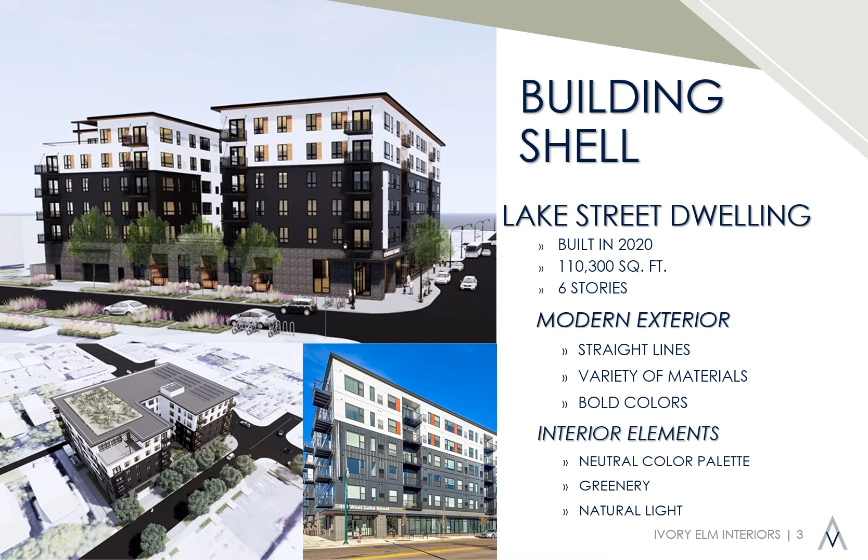Abby and I wanted Elevate to be different and unique to the NDSU campus. After looking at a variety of buildings, we chose to redesign the Lake Street dwelling to be our new student housing complex. The Lake Street dwelling building is located in Minneapolis and currently serves as an apartment complex. With over 110,000 square feet to offer, Abby and I took on the challenge of space planning and designing a new space for NDSU students to live at.

We decided to relocate the Lake Street dwelling to just on the edge of campus, on the corner of 17th Avenue North and 10th Street North. Currently, University Village is located here. Our plan would be to remove the southeast corner of buildings to allow for 83 new apartment units to be housed there instead, which can sleep at least 122 students.

We like this location because it is near a well-developed neighborhood, there are mature trees around, and there's public transit just across the street. After selecting our building and our site, Abby and I then began the design process.

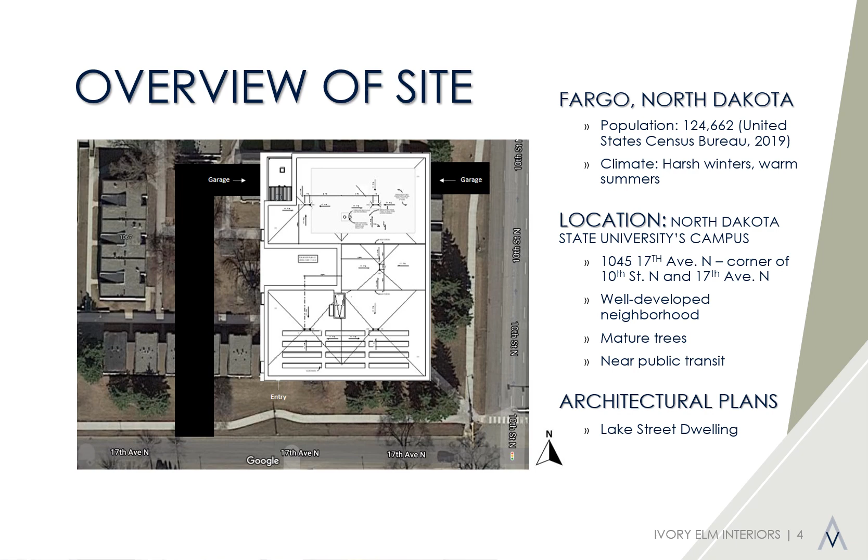Before we began the research process for this project, we developed goals that we knew we wanted to achieve through the new interior design of Elevate.

The three main design themes that we wanted to focus on in our research were how spaces impact overall well-being, ways to create a sense of community in a student housing complex, and methods for incorporating resident personalization. By developing these themes, we could narrow down our research to find out the best way to go about designing this new space.

A student housing complex is a great way for students to meet new people and have designated spaces to focus on their studies to ensure academic success.

To begin our research, we decided on two areas of focus for our literature review: sense of community and student well-being. While sifting through the numerous articles we read, there were a few things that repeatedly stood out to us, a few of those being the utilization of natural light, acoustical control, and providing collaboration areas for students.

Our literature review also emphasized to us how important certain aspects of a student housing complex are for residents. These days, students desire a variety of seating options for various majors, on-site amenities like a fitness center and technology center, and finally, the ability to dim lighting in their common spaces.

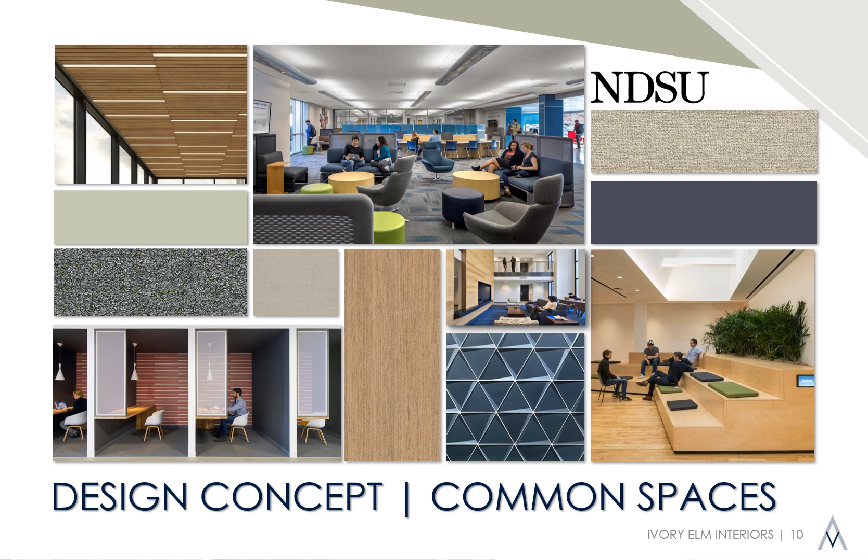From our research, we learned that students prefer to work and gather in a variety of spaces, so it would be important for us to showcase both private and public areas while still incorporating a variety of modern finishes and great amounts of natural light.

The same is true with the living quarters. Our goal was to bring sleek, modern finishes into the apartments that have great natural light. From our various tours of student housing and apartment buildings, neutral color and finish palettes were often used to allow residents to personalize their spaces as they wish. We want our apartment typicals to feel modern, clean, and include finishes that can withstand many years of wear as students rotate through NDSU. Durable finishes like quartz countertops, ceramic tile, and luxury vinyl tile will help keep the apartments looking as though the complex had just opened.

The first floor of Elevate houses amenities such as a conference room, technology center, fitness center, and multi-purpose room. We chose to design the multi-purpose room on this level. It is located right off the main corridor, and it is available to all residents.

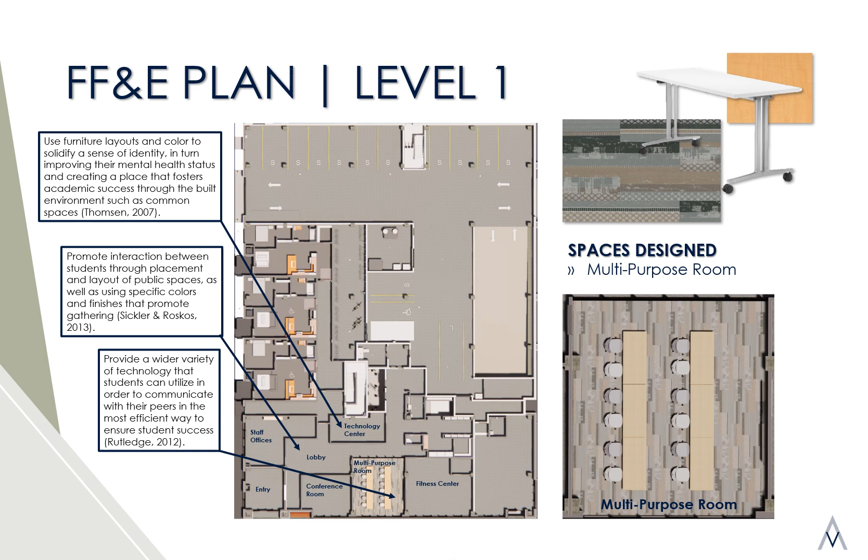From an article we read by Katrina Rutledge, we learned that it's important to incorporate a wide variety of technology within common spaces to allow for efficient communication and productivity. We have provided power receptacles under the tables and in the front for a podium to increase flexibility with this space. The multi-purpose room is equipped with a projector for presentations, seminars, or trainings.

The tables and chairs all have casters so they can be moved around easily to be manipulated for different events taking place. You'll notice that this room also has a drop ceiling to help with acoustics, while still emphasizing the height of the exposed 13-foot-high concrete slab above.

The carpet in this room also helps with acoustics while bringing in some fun texture, pattern, and branding colors to the space. The multi-purpose room is full of natural light thanks to the floor-to-ceiling windows. However, we have also provided remote control roller shades to help with any glare that may become an issue during presentations.

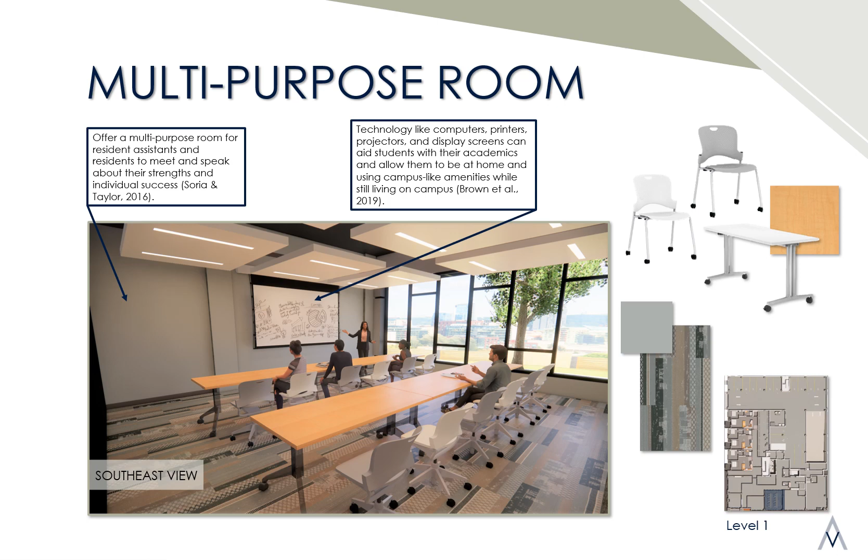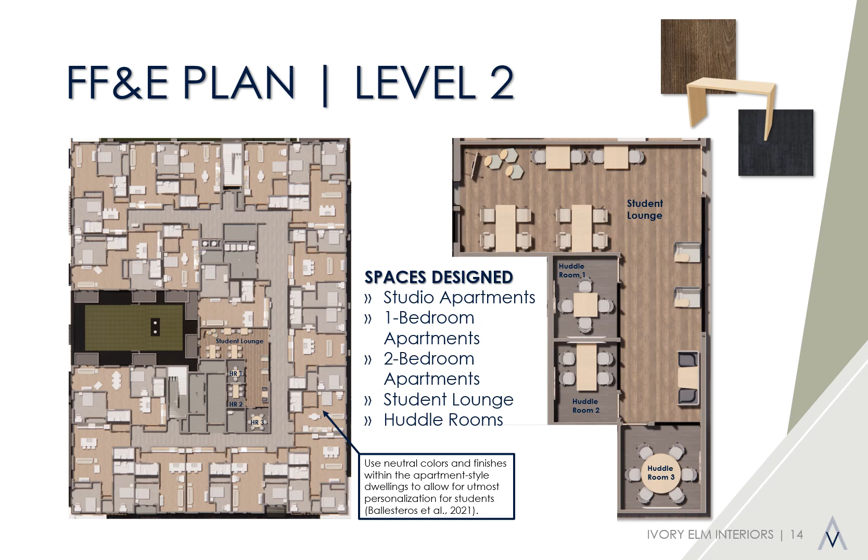This is the floor plan for the second floor of Elevate. We have space planned and designed for the various apartment typicals, student lounges, and huddle rooms on each floor. More specifically, the floor plan on the right outlines the student lounge, which has access to a balcony that overlooks the private interior courtyard. There is plenty of space for students to collaborate on projects or work independently, whichever fits their learning style best. Here is an interior rendering of the second floor student lounge.

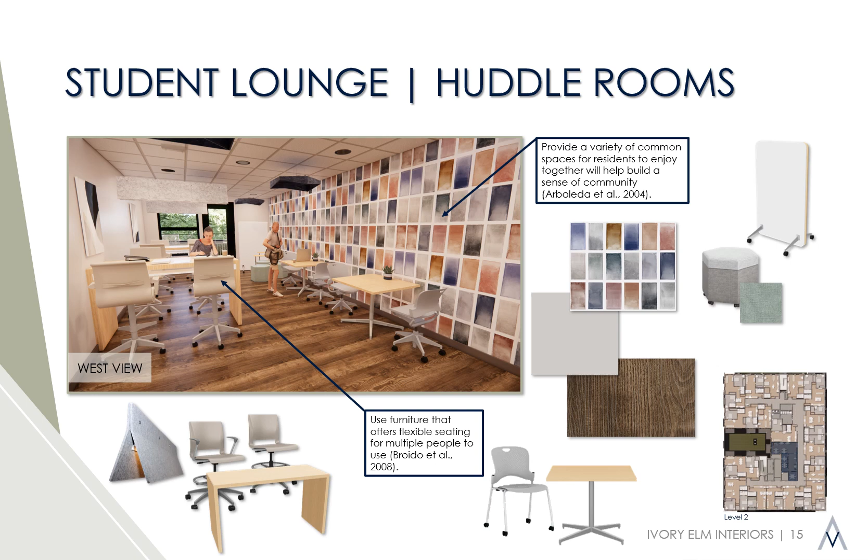There are also individualized seats near the glass walls. These glass walls help carry the natural light from the exterior through to the interior corridors.

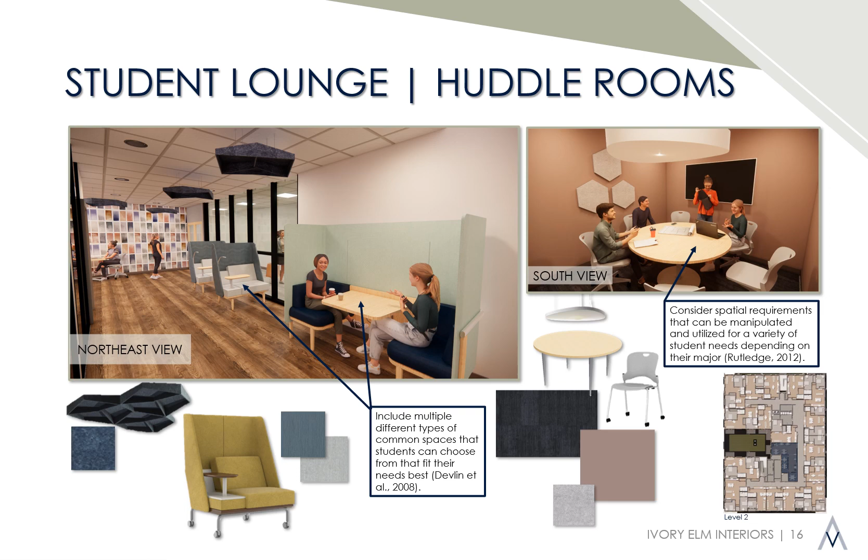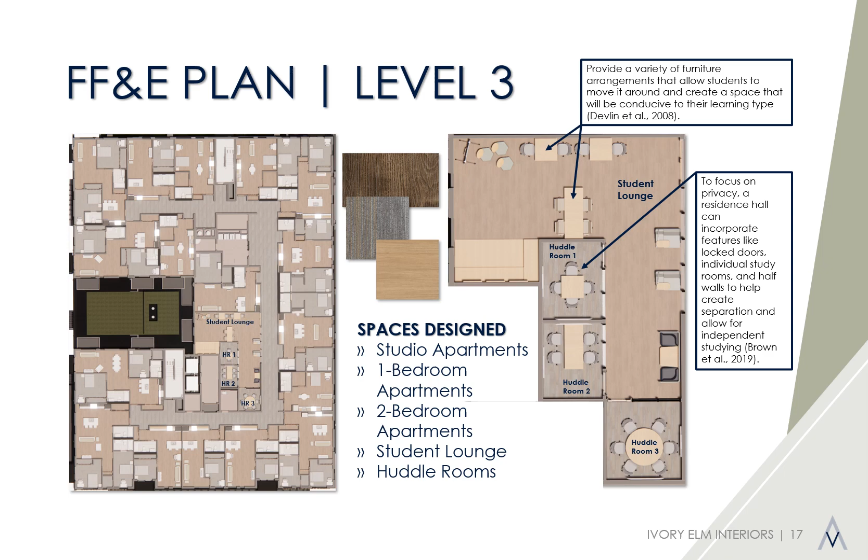The huddle rooms are specifically designed within the lounge to create privacy and acoustical control for students who want to study or chat as a group but still have the separation that they desire. By having a student lounge on each floor, we hope to increase student interaction and aid in socialization across the building.

This lounge is unique because it has bleacher seating that students can use to study and work on assignments. To ensure this feature can be used by those of all abilities, we designed the top seat to be at 21 inches above the finished floor, so if someone were in a wheelchair and would like to sit in the bleachers, they can easily transfer to the top seat. These design considerations can create a sense of belonging and promote student success, no matter their ability.

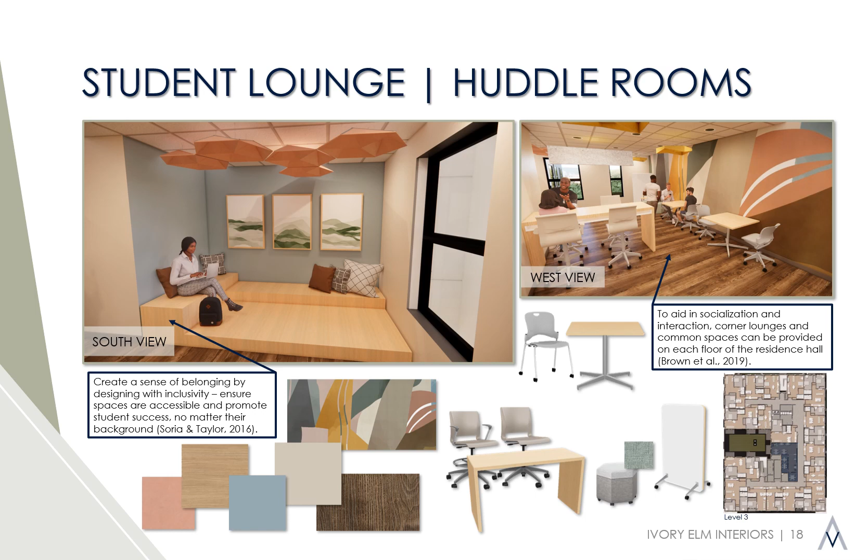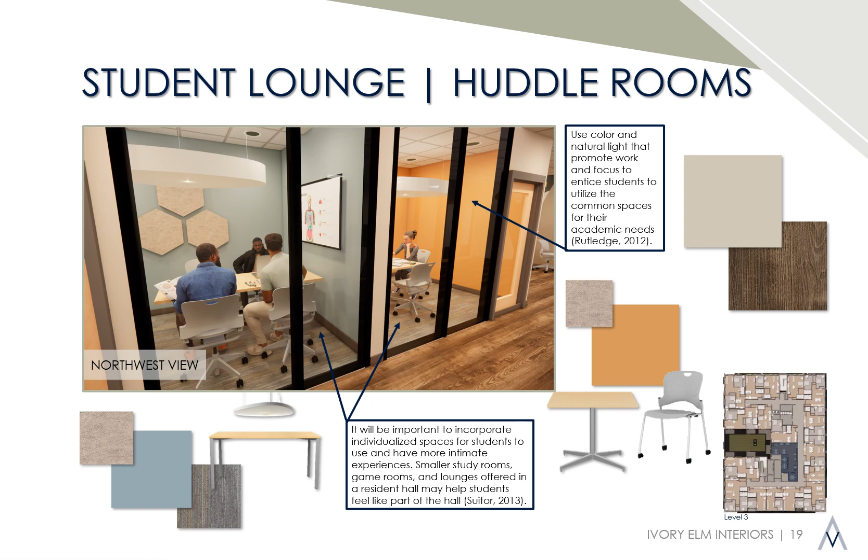From a 2013 article written by Daniel Suitor, it is important to have smaller rooms like these to help students feel like part of a community without directly being around other students in the complex.

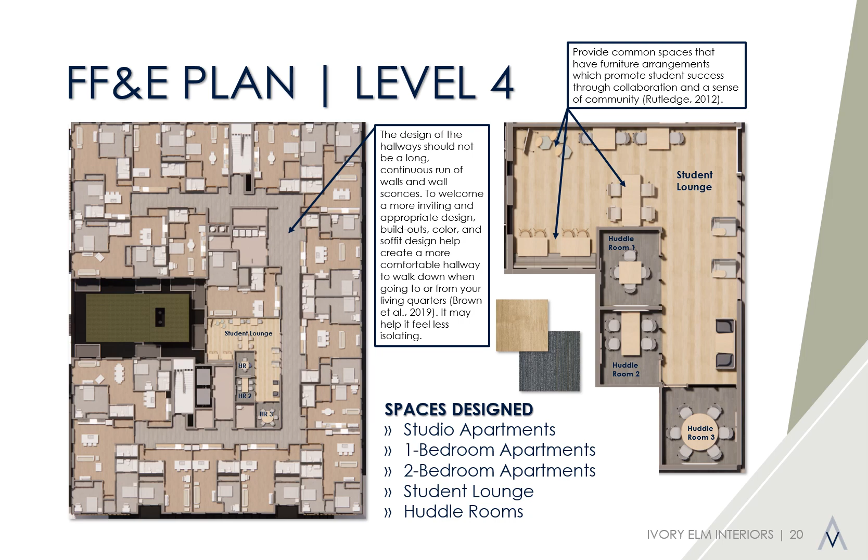Moving up the building, we are now on the 4th floor of Elevate with another student lounge and huddle rooms. While each level has the same furniture layout, we wanted the nooks in the upper northwest region of the plan to have a unique element on each level. This level provides booth seating. The various types of seating options allow for independent workspace or a casual spot for residents to hang out with friends. The booth seating on this level encourages socialization between residents and helps create a sense of community for them. The drop ceiling above the booths helps to define the space and makes it feel more inviting.

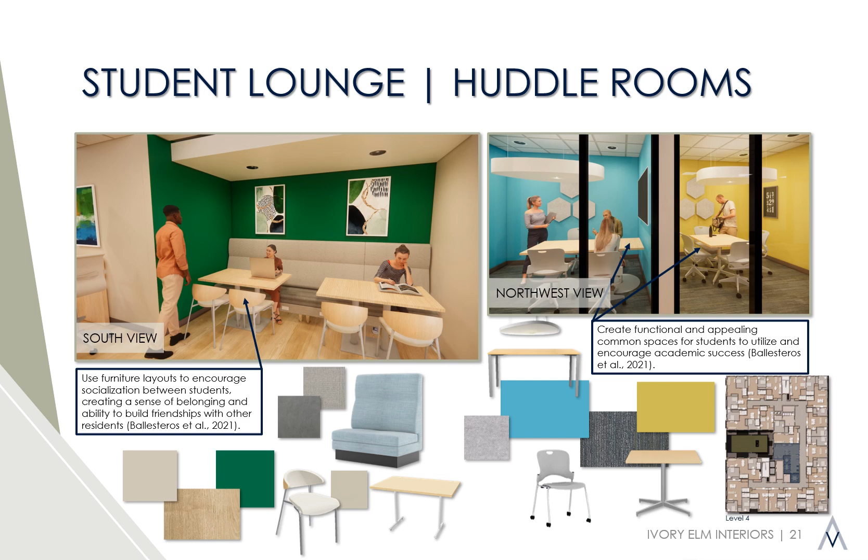We chose to use vinyl upholstery on the booth seat for easy maintenance and to uphold the longevity of the furniture. We chose bright, fun colors for the huddle rooms, which brings more energy and life into these spaces. The glass walls in the huddle rooms not only help with acoustics, but bring in natural light and help students determine more easily whether or not the space is being occupied.

In this student lounge, we chose a fun, lively wall covering to help set the tone for this space. The vibrant color helps encourage interaction and collaboration between peers. By providing student lounges within the building, not only do they aid in academic success, but they also provide another space for interaction outside of the students' apartment dwellings.

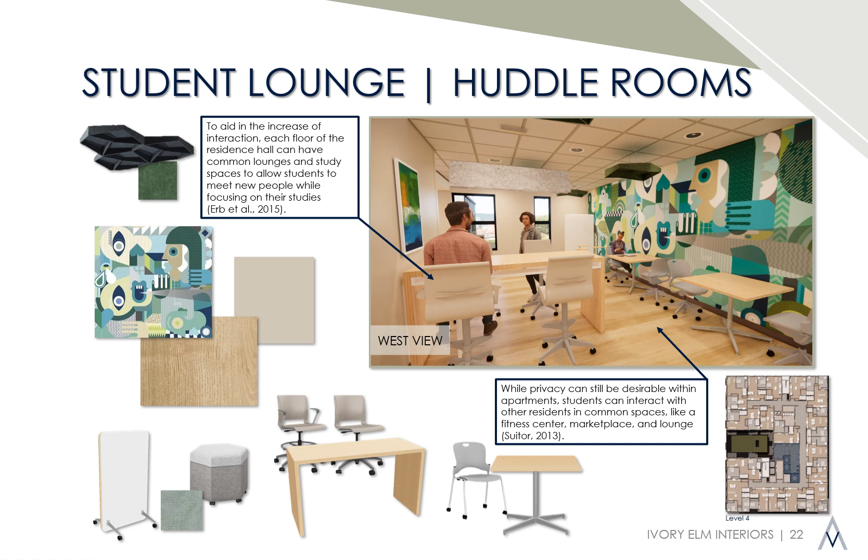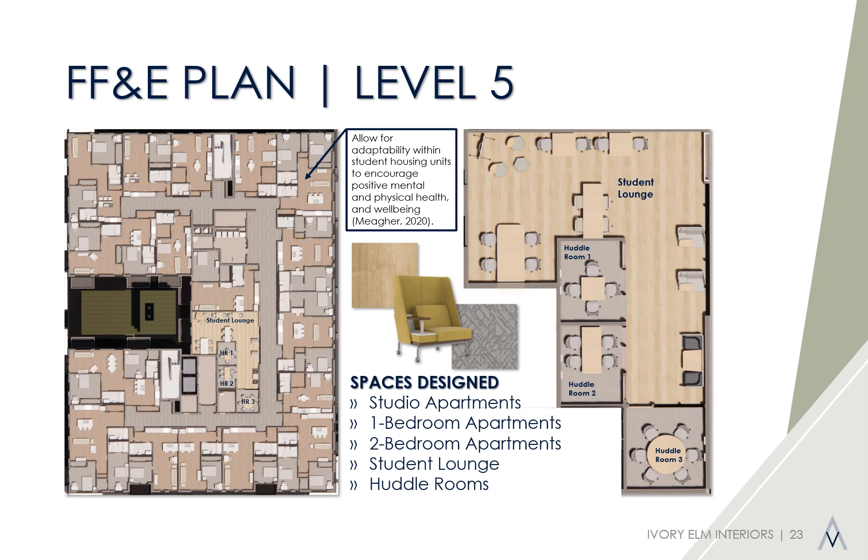We also have movable chairs with and without arms, which gives students the option of the seats they prefer to use and helps aid in accessibility. These chairs are also height adjustable to allow for a more comfortable position.

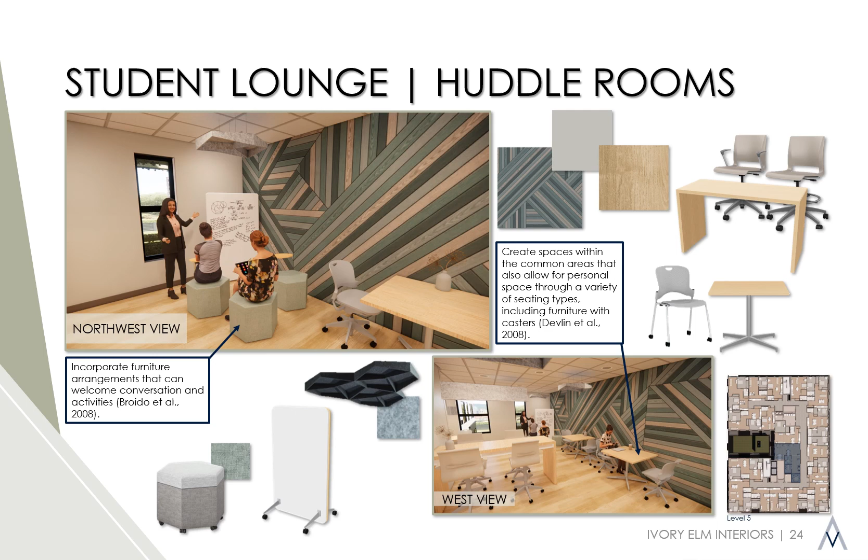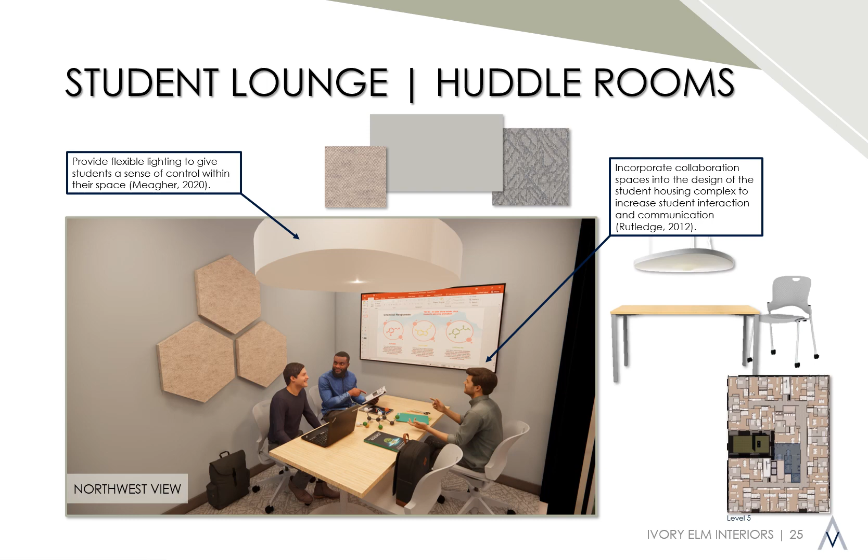Here's an example of one of the huddle rooms where students are sharing their screen to the TV and studying. They can also adjust the lighting in their individual room. Through our research, we learned from Benjamin Meagher that providing flexible lighting with dimmability options helps students have a sense of control in their own space to best suit their needs.

Finally, we have reached the 6th floor of Elevate. The 6th floor is unique because it has a student lounge with 2 huddle rooms, a recreation room, and a vending marketplace where students can conveniently grab a snack during those late-night study sessions.

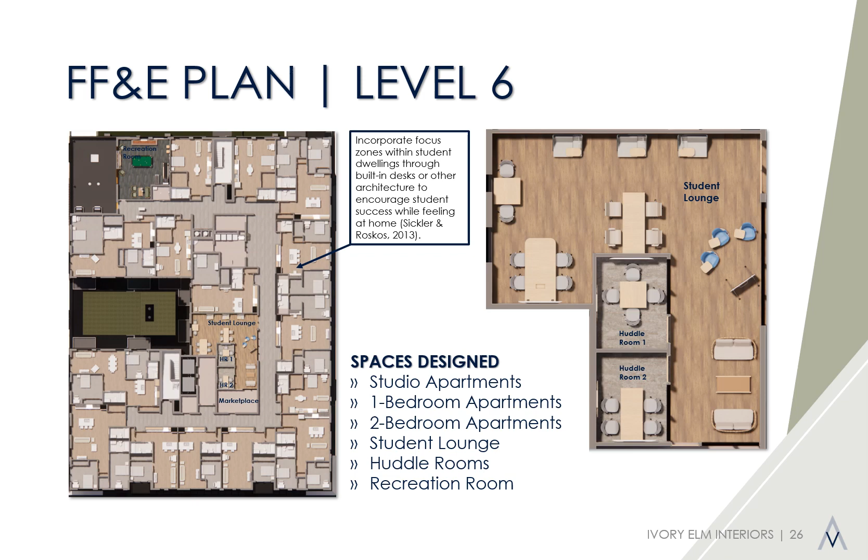Within the student lounge on this level, we chose to incorporate soft seating for a more casual living experience for residents. There are also chairs on casters with laptop tables built in, along with a whiteboard, so students can practice presentations or host a tutoring session.

This student lounge includes calming colors of soft green and pale blue to help boost focus for studying purposes. The dark flooring contrasts the light wood surfaces and provides hues of orange to coordinate with the statement wall covering.

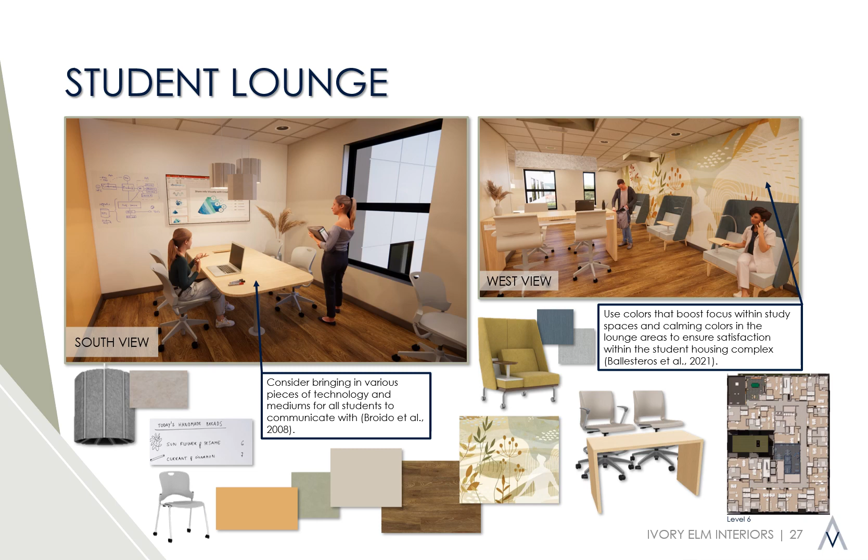We have also included a collaboration table in the nook with a marker board wall covering, as well as a TV to allow for the most flexibility for students based on what they're working on. We have also included seating that accommodates social gatherings through sofas with an upholstery that has high abrasion resistance, but still encompasses a soft texture. Acoustical pendants above the soft seating help define the space while providing accent lighting and acoustical control while students are visiting.

The glass walls lining the lounge allow students walking by to see what's going on in that space and can help promote interaction between residents. In the distance, you'll also notice that the apartment doors are inset with a different paint color and a drop ceiling to make the entry feel more home-like and to avoid long, typical hallways that we've seen on our tours.

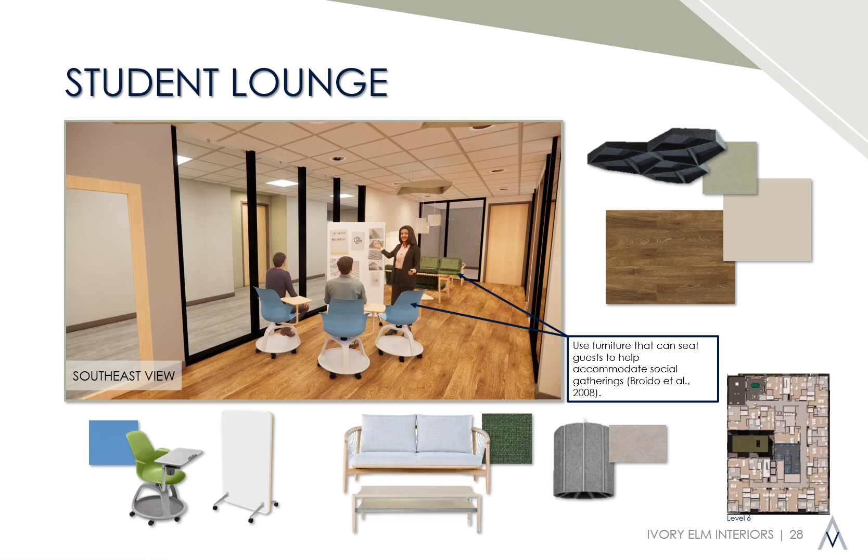After conducting our research, we learned that many students enjoy using a space where they can decompress and have fun. This recreation room is located on the top floor and overlooks the Fargo community. Our goal for this room was to feel welcoming and fun, somewhere where students could go to hang out with their friends, watch games, and have some friendly competition.

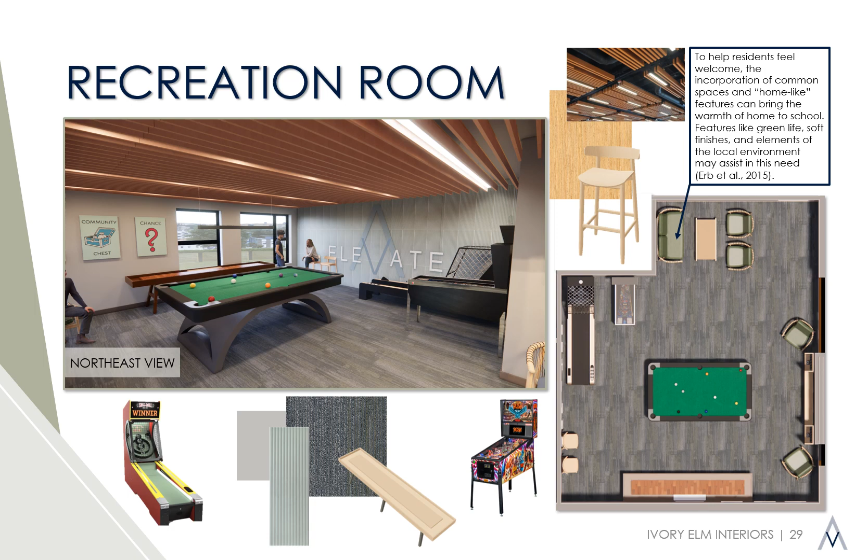We learned that shuffleboard, pool, skee ball, and pinball are some of the most popular games students enjoy playing indoors, so we wanted to ensure that they were in our design. We also wanted to include specific branding into this room because it is unique to NDSU's campus and it makes for a great backdrop for social media posts.

Along with games, this recreation room also has some seating arrangements great for table games and chatting. Our custom entertainment stand houses the pool cues along with books, games, and the TV, which is perfect for Bison game days. We want to encourage conversation and fun activity in this room, so it was important to finish the room with carpet, acoustical pendant lighting above the seating nook, and acoustical wood-like baffles to help with sound absorption.

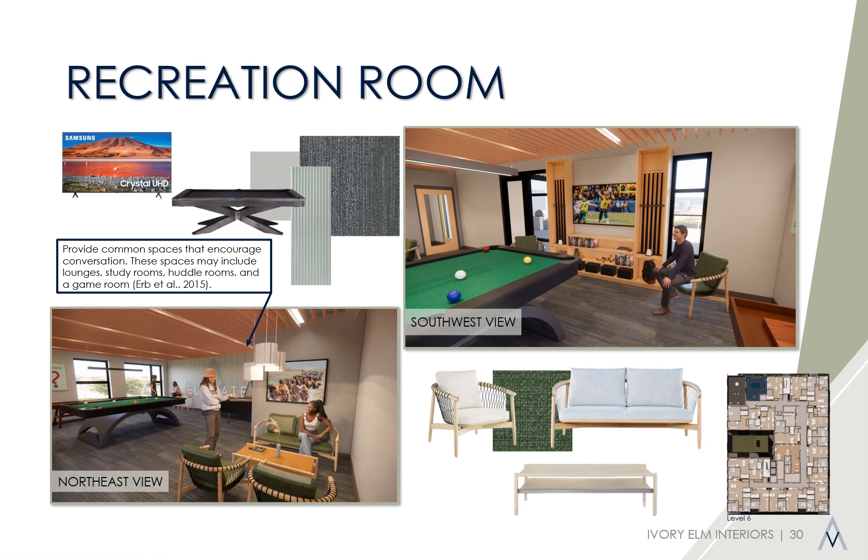Since the vending marketplace is also located on this floor, it is just a short walk from the recreation room. This space also opens up onto a rooftop terrace where students can enjoy outdoor seating and fire pits.

The living quarters are just as important as the common spaces we just discussed. Through our design process, we went through multiple revisions to create 6 apartment typicals that fit the unique shape of our building. It was a challenge to arrange the walls around a variety of windows from the existing building. We wanted to ensure there was a strong balance of studio, 1-bedroom, and 2-bedroom apartment typicals to allow flexibility for both the owner and the resident.

There are 83 total units throughout the building, and each is designed with the same finishes. Through our research, we learned that closet space, dishwashers, and natural light were crucial to include for today's student apartments.

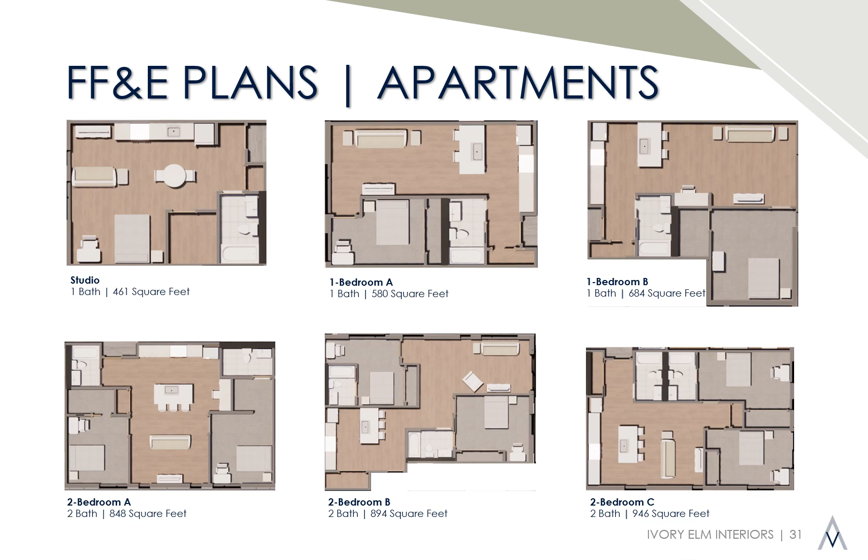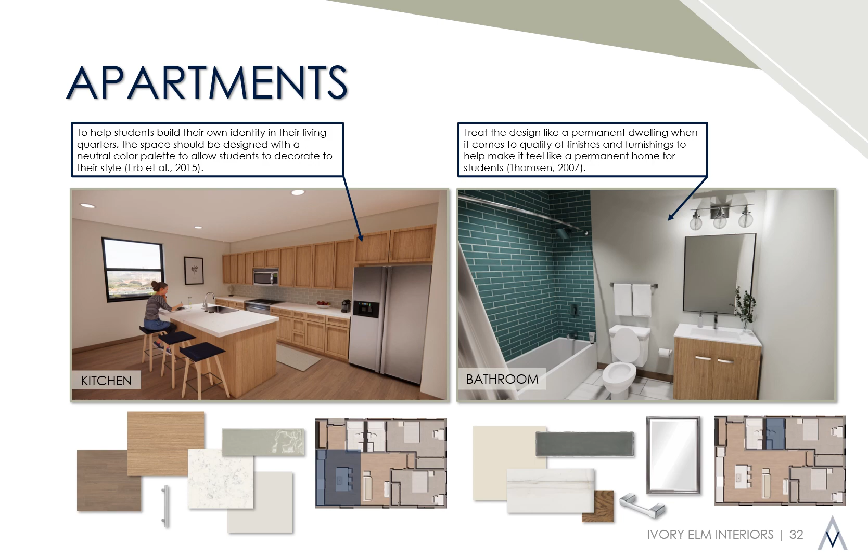While we are providing specifically designed accessible apartment units on level 1, we decided to consider the Fair Housing Act a little further after a critique presentation, and we felt it necessary to include an option to make the one-bedroom B apartment typicals into accessible units as well. And the best part is, nothing structurally would have to change for this to become reality.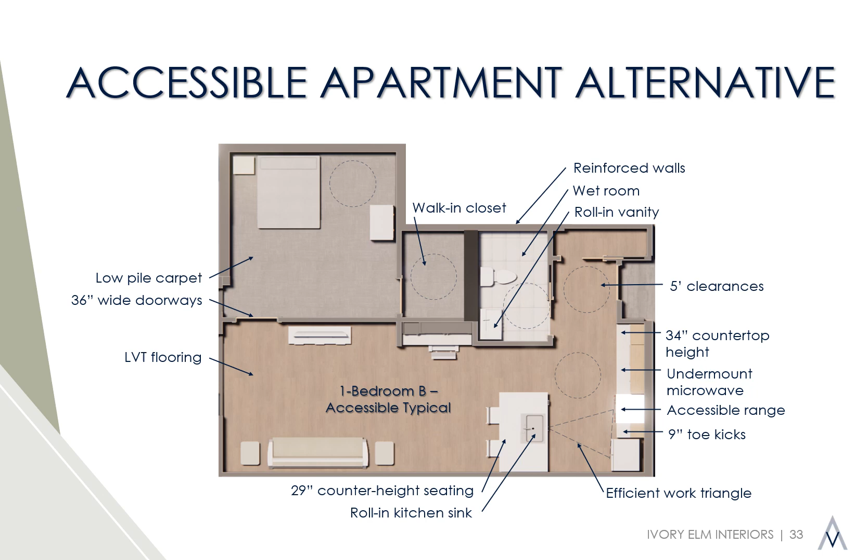By modifying a few things in the kitchen and bathroom, this unit becomes ADA accessible on every floor. While these may seem like drastic changes, they're actually very minimal and would allow those with a disability to have an apartment unit on a higher floor and feel more included within their living environment.

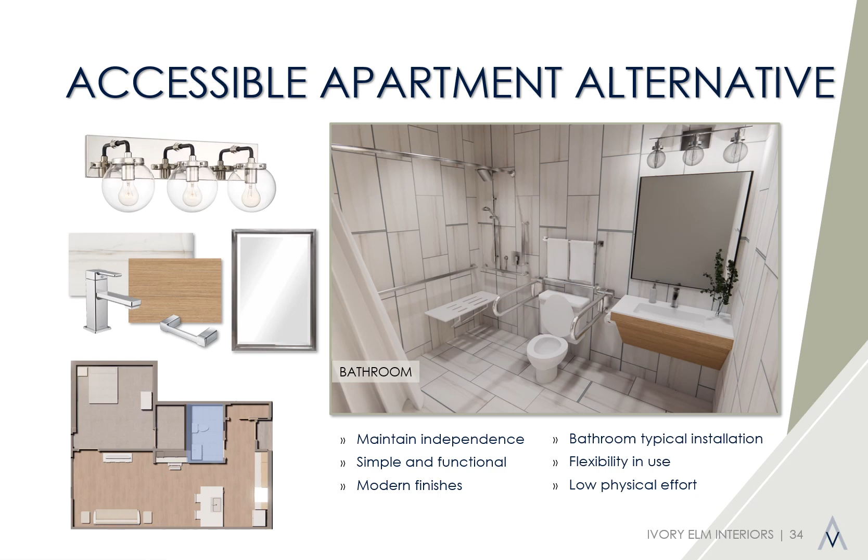This accessible alternative provides flexibility for the developer to decide how many extra accessible units they would like to provide within this new student housing complex.

Elevate will help students create a sense of community through the incorporation of common spaces filled with natural light, flexible furniture, and allowing personalization in the living quarters. These design elements have been shown to improve students' academic success and overall well-being.

The students of NDSU desire a space that is inclusive, modern, and provides the independent lifestyle that Elevate will create. Thank you all for taking the time to listen to our presentation.